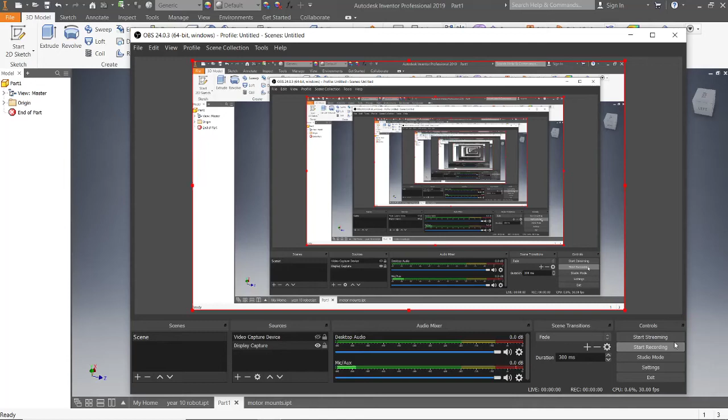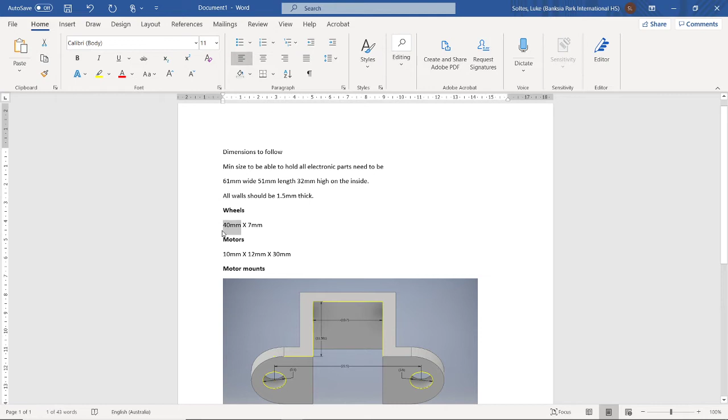Alright, we're just going to make the basic robot. So you have quite a few constraints that you need to follow when making a basic robot. Okay, you've got to think about your wheels. So you can't have your robot extrude any more than 40 mil, or your wheels aren't going to touch the ground. Okay, you also have to think about a lid as well.

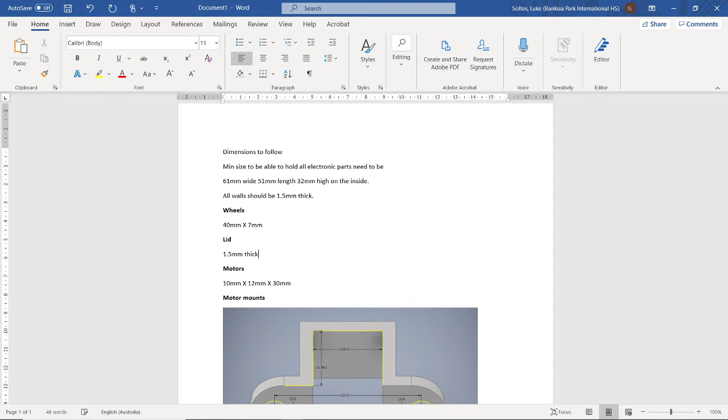So your lid is actually going to be 1.5. Okay, and then you have to make the lid as well. So yeah, we're just going to make the basic one.

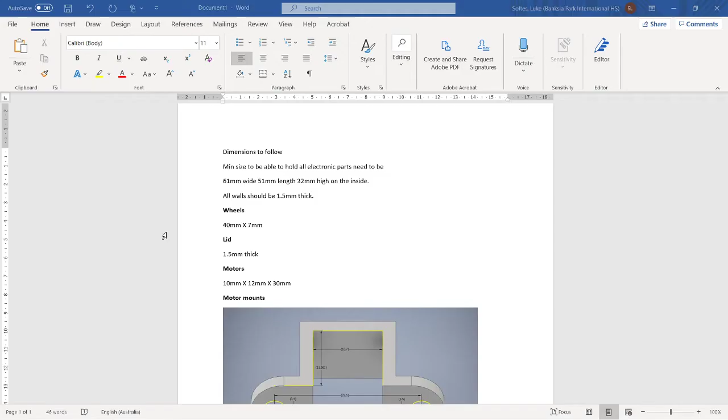So to start off with, one thing that we need to remember as well is the minimum size to be able to hold all the electronic parts. Okay, so we need to make sure that all our parts are going to fit inside the robot. So it has to be at least 61 millimeters wide, so the motors sit side by side. It has to be at least 51 millimeters in length. That's so we can put all the stuff in the front. And it has to be at least 32 millimeters high.

Okay, now that constraint depends on how high you have your lid, but you want to make sure that your height doesn't exceed the size of the wheels. Okay, but these other ones are important. So you could have a really small one and have big wheels. It's up to you. But for this demonstration, we're just going to make sure that it's 32 millimeters high on the inside. So these dimensions are on the inside, not on the outside. So that'll make it a little bit different.

Right? So to start off with, with these ones here, we add an extra 3 mil, because the outside is 1.5 for the thickness of our walls. Right, it's 1.5 thick. We want to make sure they're fairly sturdy, so we'll make them 1.5. So we're going to start off by creating this box.

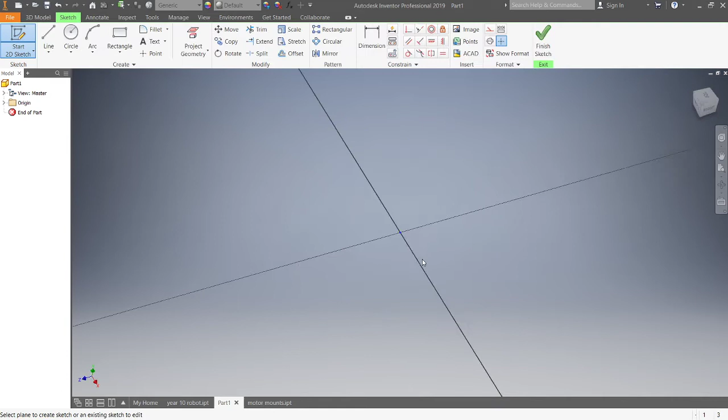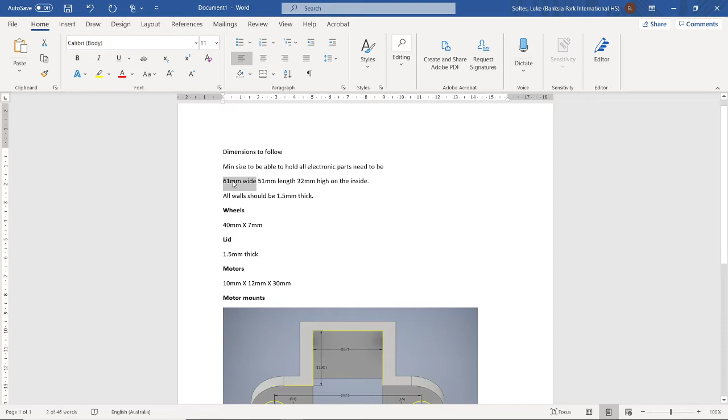So we just go new 2D sketch, and I'm going to go to the XZ plane. I'll put a rectangle. The rectangle is going to be 61 millimeters wide. That's on the inside. So we want to make that plus 3, so it's 64 on the outside. So we go 64, plug that in. And our other length was 51, so that's going to be 54. So then that's the start.

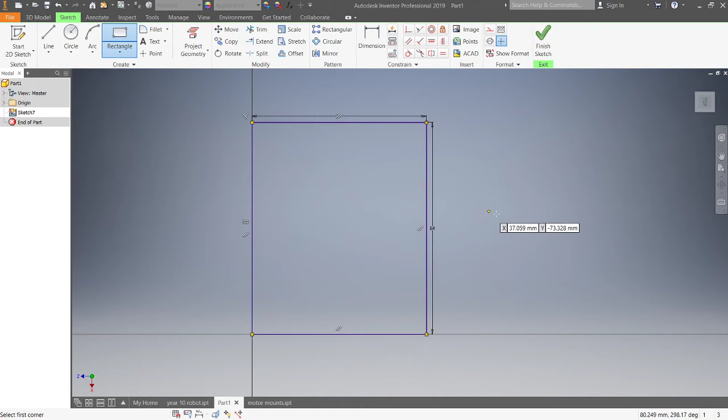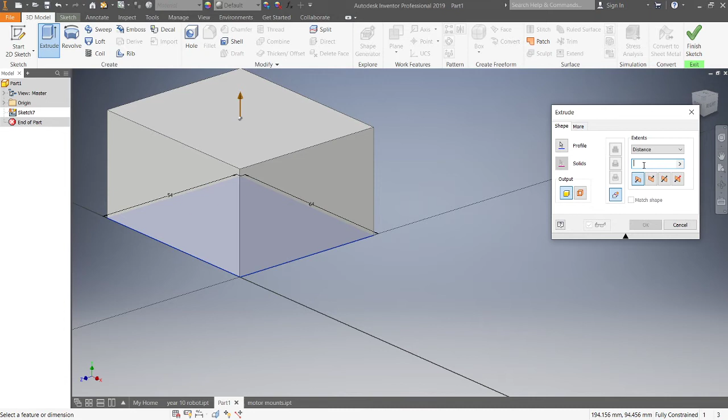Then we'll extrude that. Now the height is 32 on the inside. So if we extrude that plus the 3 mil, that's going to be 35. That gives us 1.5. So in total, that lets our wheels protrude. I might make that 30. So if I want the whole bot in itself to be 30 mil high, let's go 30.

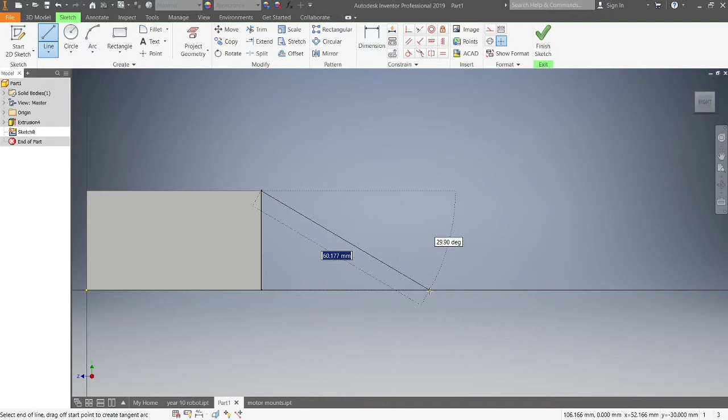Now, on the front of our robot here, we want to have a scoop that'll drive underneath another robot. So I'm going to draw on this surface here, new sketch, click on this surface. I'm just going to draw myself basically just a triangle. And I'm going to bring that out about 60 mil, and then bring it back down here.

Okay, so now if we put our dimension tool on, we want to go from this line here to this point here. We don't want that to exceed 100 mil, so let's just make that 100 mil, okay? Because that's the size limit that we have.

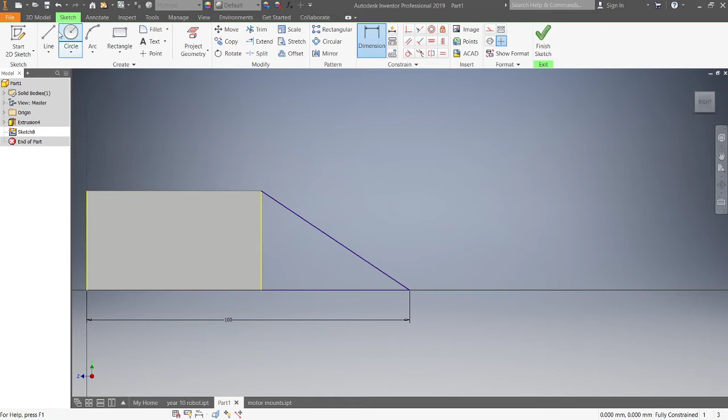So now we're going to extrude this one here, and we're going to extrude it all the way to the sides. Instead of doing distance, we can just go To. And then just click here, and then that'll go there. That's what we're after. Now, I want to curve this triangle around slightly. So I'm going to go new sketch on here.

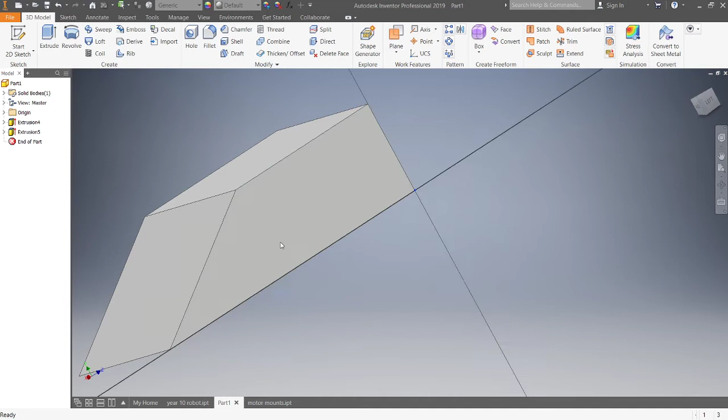Then I am going to put a line down here, straight down here. Now to make sure it's straight, you see the 90 degrees, so we can write 90 degrees, and it'll stay at 90 degrees, there's no work for my mouse, and then I can click on that bottom there. Right click, go OK. Now I want to bring these lines into the sketch, so I've clicked on them.

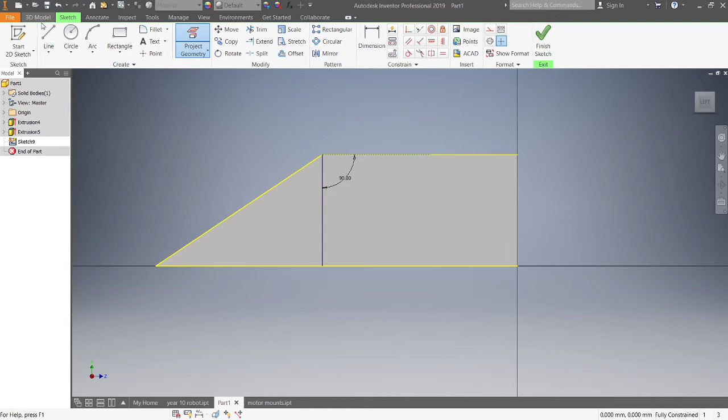So what project geometry does is it brings lines from other sketches into the sketch that you're drawing on, because you want those ones too. Now if we go to model, we want to revolve. I want to revolve this triangle here, and the axis is this one here. Now it spins the whole way around, but I only want to go angle 90 degrees. Push OK. And now I'm starting to get that sort of swoop there.

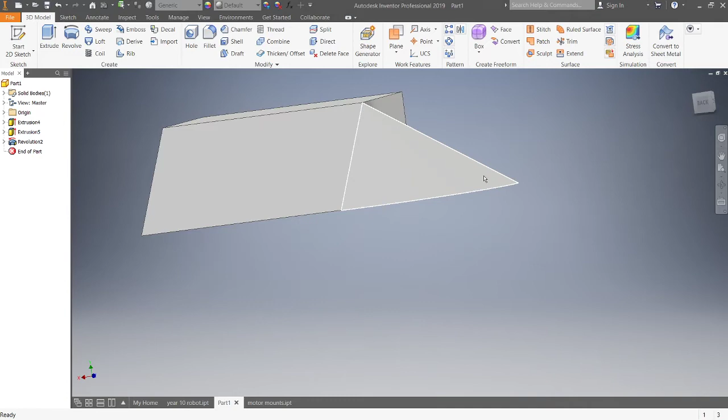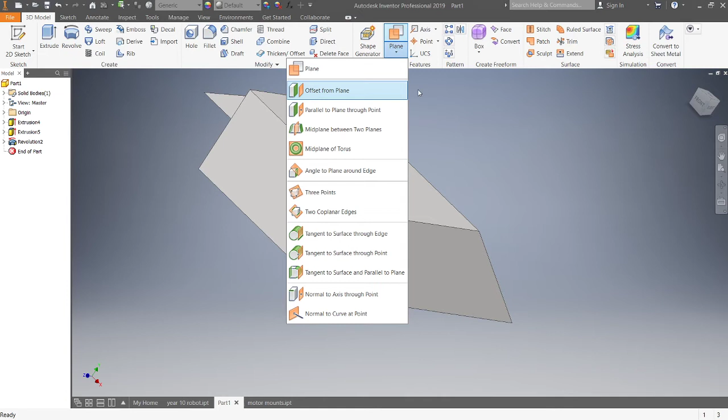Now we're going to make sure we do that to the other side over here. Now, easiest way to do that is how wide was our robot here. So the width of our robot is 61. So half of that is going to be 30.5. What I want to do is I want to put a plane. So I'm going to offset a plane when my computer wants to.

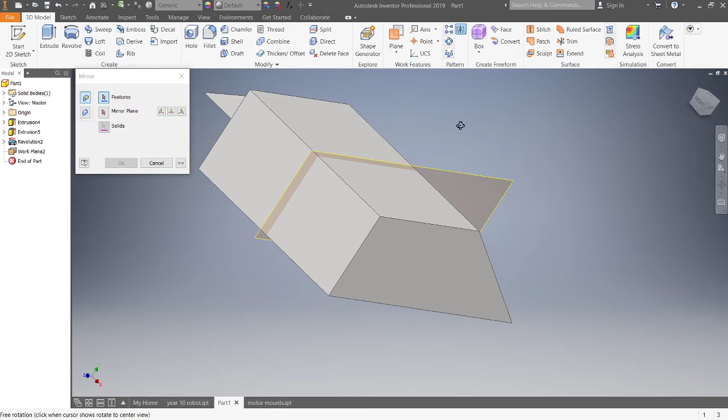So if I click here, I want to offset this plane to go this way. So it's a negative. And I want to offset that to 30.5, because that's going to be right in the middle. Push OK. Now, because I've done that, I can now use my mirror tool. I'm going to mirror features, this, and I'm going to mirror that on this plane here.

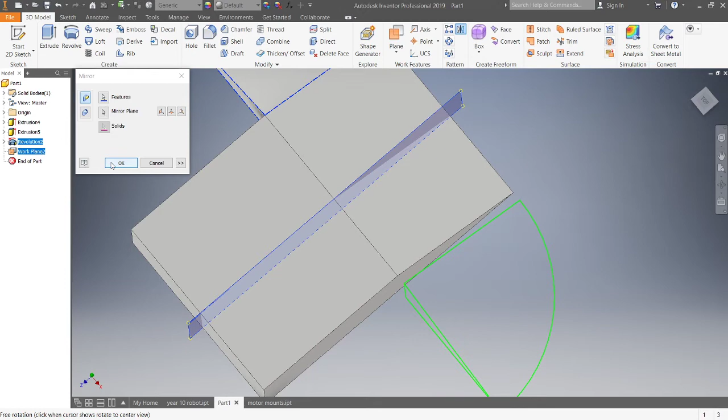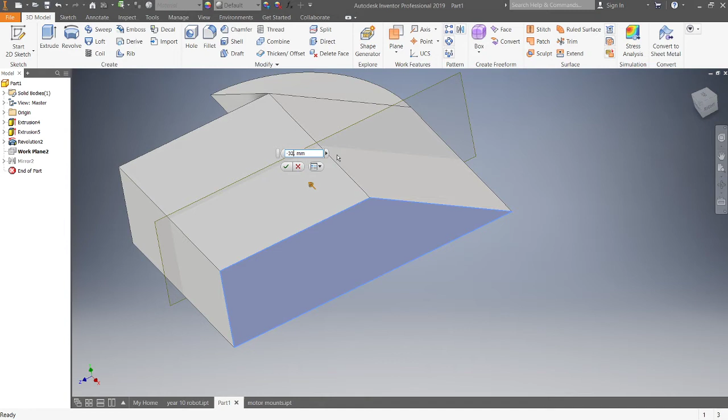Okay. Now that hasn't actually joined up, so that means that this plane here is not in the right spot. Let's have a look. What did I do wrong? I did 61. I didn't have the other 3 mil. So this work plane here is actually another. So how wide is it? It's 31. So it's going to be 32 wide. So that should be halfway. Oh, cool. Now that's snapped where we wanted it to snap.

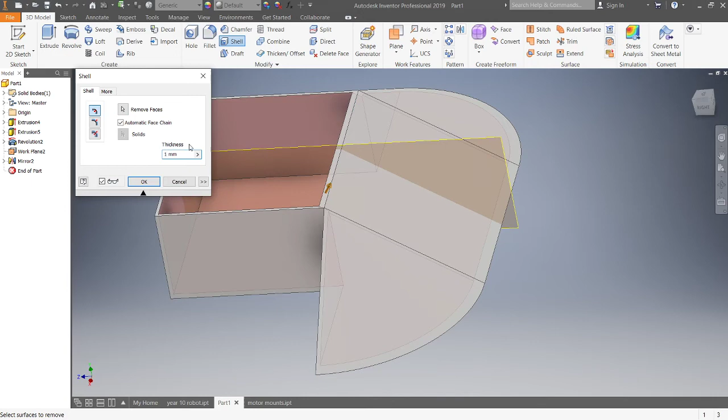So now that we've done this, we're going to shell out. So now we're going to remove this face here, and then we're going to shell that by 1.5. Then if we push enter, now we've got our robot here like this. Okay. Now what we also want to do is we want to just make sure that the inside here has some supports.

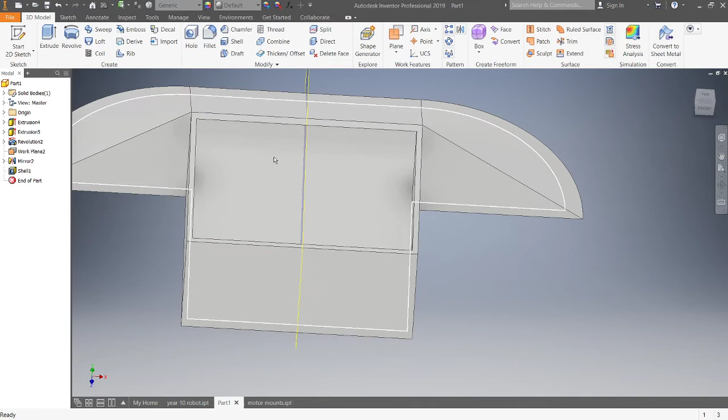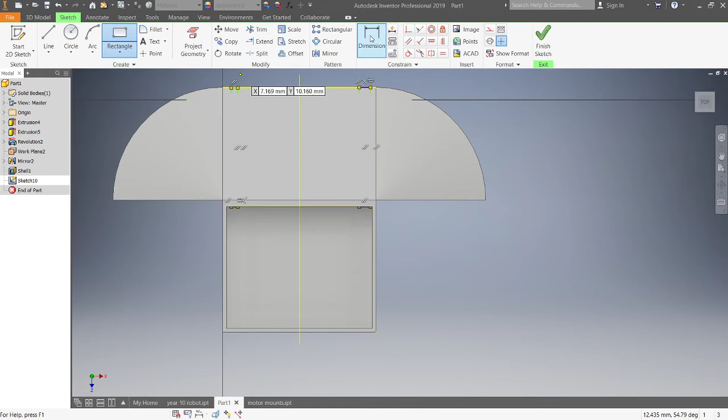So on the inside, we're just going to draw on this surface here. We're just going to draw some rectangles. Alright, we're going to go from this line here straight down to there. So from here straight down to there. Now we can put dimensions on that. Make them 2 mil.

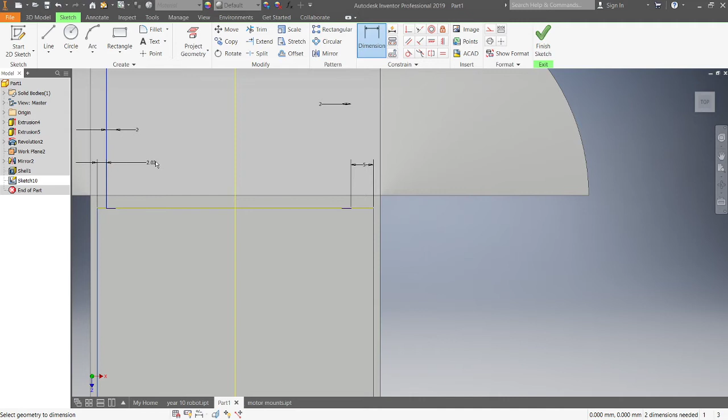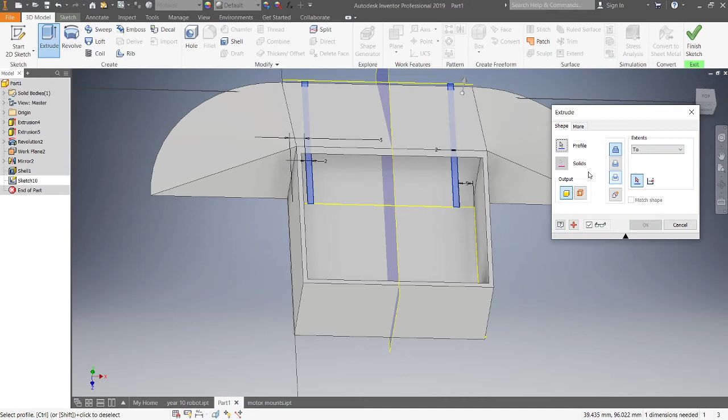And I'm going to make the distance from here, I'm going to make that 5 mil. Distance from here, 5 mil. Now, so we should have our rectangles there, so if we go extrude that, click on here, now we see how it goes past here, so we change this to To, and then we just click on that base there.

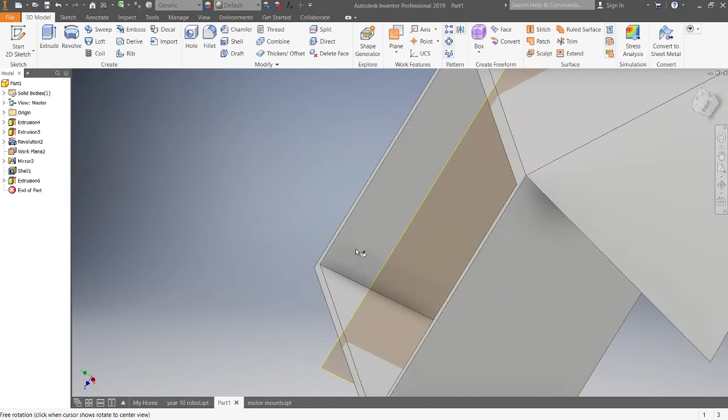So we change it to 2 next, and then that brings it up to, as you can see, next to that triangle. We'll push OK, and so now we've got extra supports on the inside there. So now we need to create a couple more things. So we need to have a hole in here for our motor. So let's go new sketch, draw on here.

What I tend to do is I like to put my motors right on the back. So I'm going to draw the motor. Now this is 10 mil high, 12 mil long.

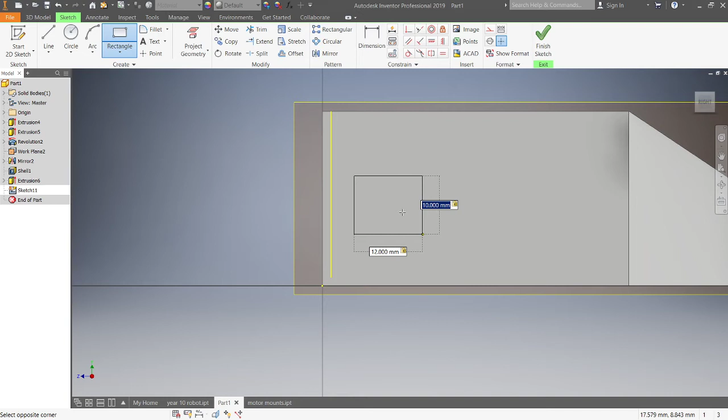Now the distance between this here and here is 0. Okay. Now the height. So what we're going to do is I'm going to cut the top of this down by 1.5, and then we'll make a lid to fit that. So to find out the height, you need to put this in the middle from here to here. So how high did we do that?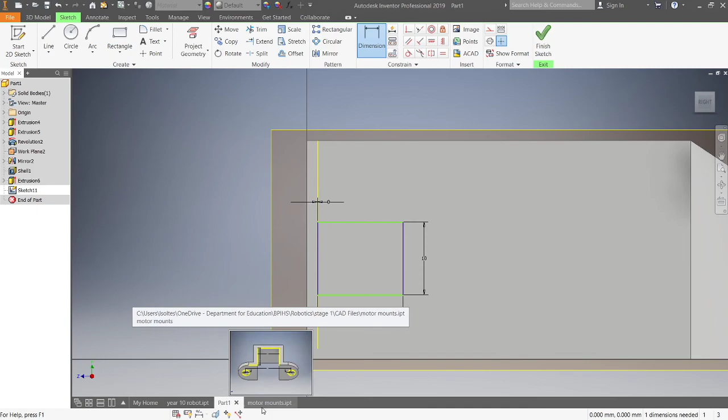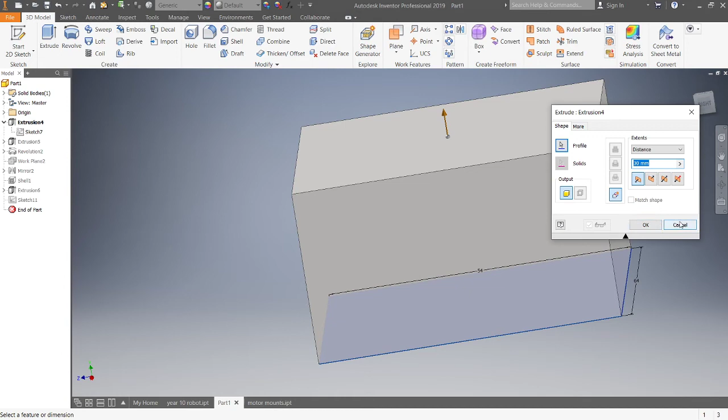We went 32 mil high. No, we didn't. I believe we only went 30. We can go here. Let me have a look at this extrusion. We went 30 mil. So, okay. Cancel that one. Double click back into the sketch here. So now we went 30 mil high.

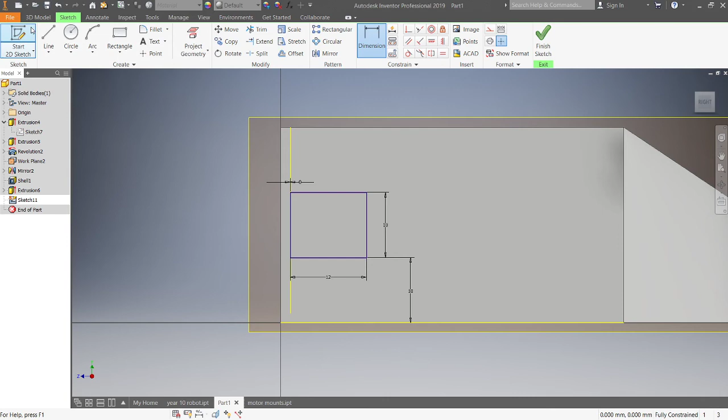So this needs to sit in the middle, which gives us a 10 mil buffer between here and here. It's 10 mil. So that means that this should be 10 mil. Yep. So if I click that now, it'll tell me that there's too many because it's already constrained. So now we're going to cut this one here out, so we extrude it. And we're just going to cut, and we want to cut the whole way through. So just grab this little arrow and cut the whole way through. So now we've got area for our wheels to pop out, for our motors.

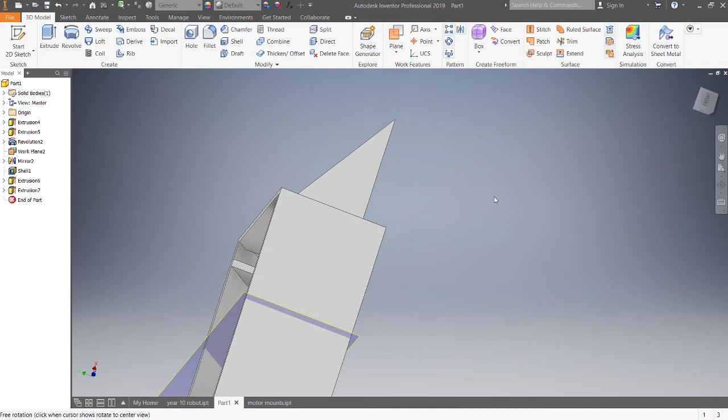Now on the back here, we need to create some holes for our motors to actually fit in so that our motor mounts are in place. Now our motor mounts, once my computer comes back, look like this. Alright, now they are 22.5 millimeters apart from each other. Okay, so these holes, they're the holes that we're going to put onto this surface here. Okay, so now let's drop our holes in. So our holes are 3.5.

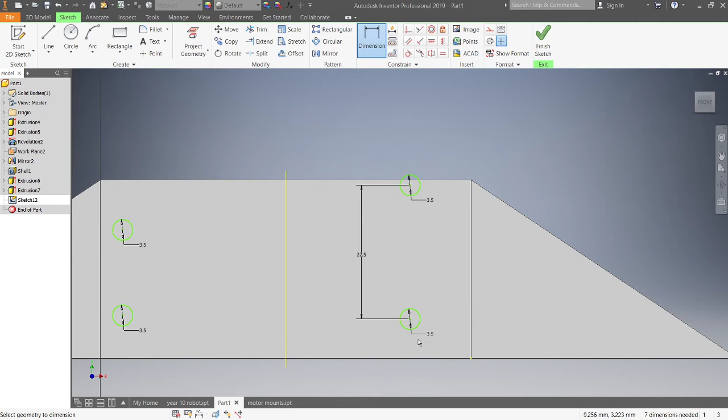I'm just going to copy that. And I'm just going to paste a whole bunch of them because I need 4. I'll just drag them roughly where I want them. Now, if you align them with each other, they should stay in line with each other. So the dimension that we want is this one to this one needs to be 22.5. Now, that gives us how much left? 22.5. That gives us 7.5 mil from each side.

So half of that length here is going to be 7.5. Half of 7.5 is going to be 3.75. 3.75. Need to click it. 3.75. And that looks like it's halfway. And that's what's going to hold our motor mounts in place.

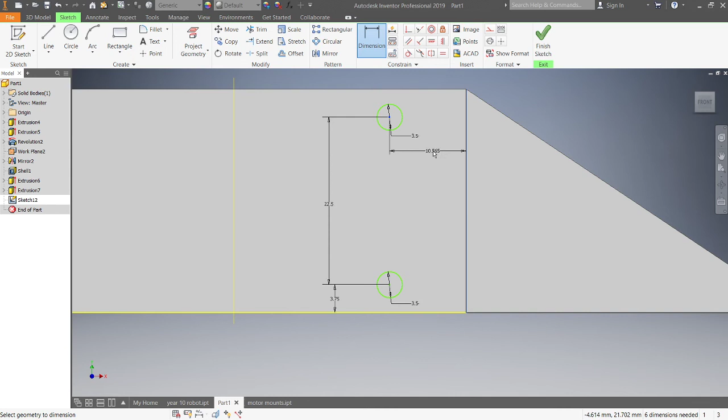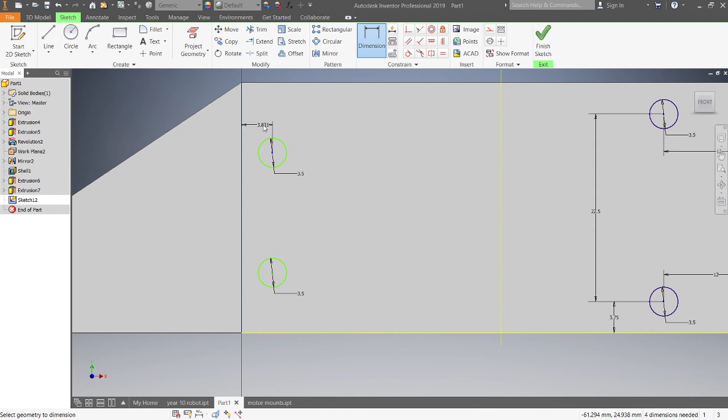So now we need to make sure that this here has a distance. We're going to make that one there at least 12 mil. Put 12, not 21. And make sure this one here is 12 as well. So now they are aligned with each other. Do the same thing to the other side. 12 mil. Thinking.

And the height between them would be 22.5. And the height to the bottom is going to be 3.75. 3.75. Okay. Now, with this one here, we might have some issues with our motor mount being a little bit too wide on the bottom, but that's okay.

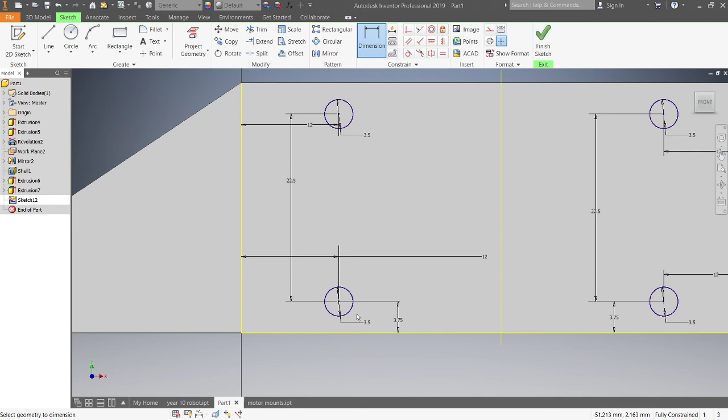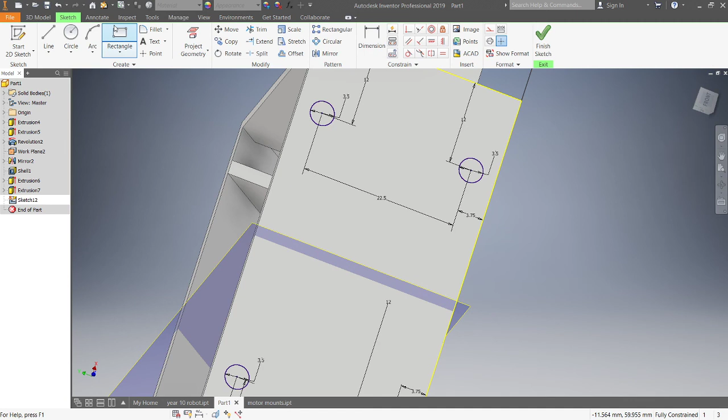Now, we want to extrude that. We want to cut these holes out here. That one, that one, that one. So select them all. And we want to go 1.5. And then we want to cut. And if we push OK, oh, that did not work. Extrude. It did cut it, but distance. Yep, so that should be fine now. So now we've got our motor mount holes. So that's going to hold our motors in place halfway out.

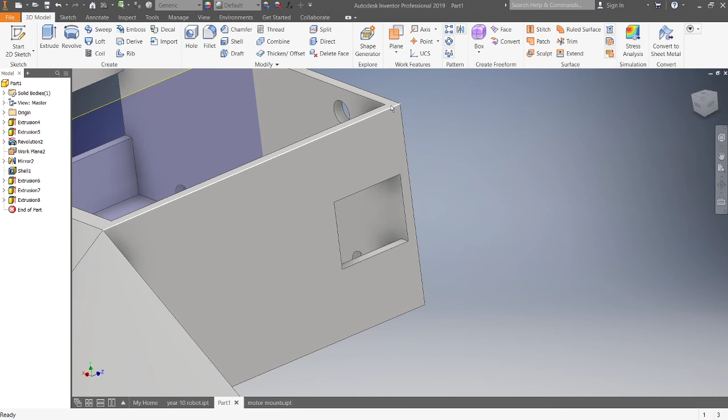Now, the next part that we need to do is to cut out this new sketch. So we're going to cut this down 1.5 mil. So a rectangle from there to there. Now, have a look at these dimensions here. You want to cut this down 1.5 mil, but you also want to create a lid that is the same dimensions as these two here. So 64 by 54. Okay.

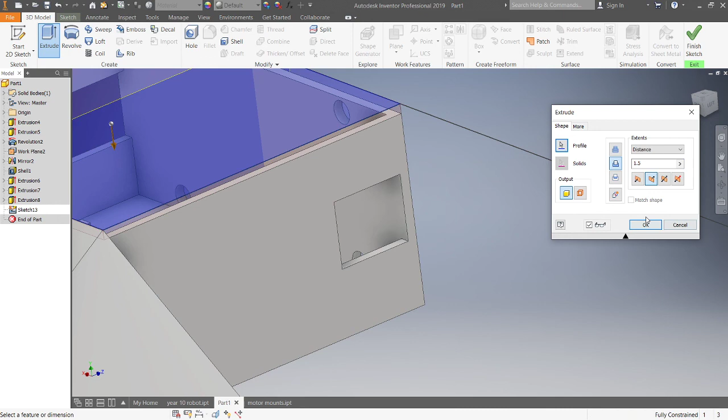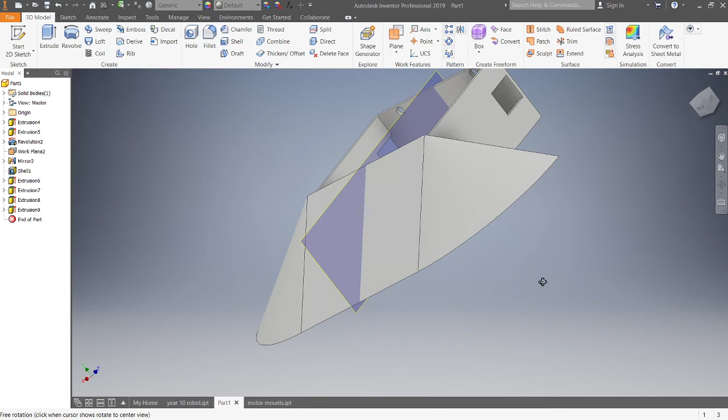So if I click that now, extrude that. So I'm going to cut 1.5 mil down so that I can make a lid to fit. And then basically we'll just glue the lid on there. Now you want to make sure that your lid is open so that you're able to turn your robot on. I'll make a lid in another video. But that is your basic robot finished. Okay.